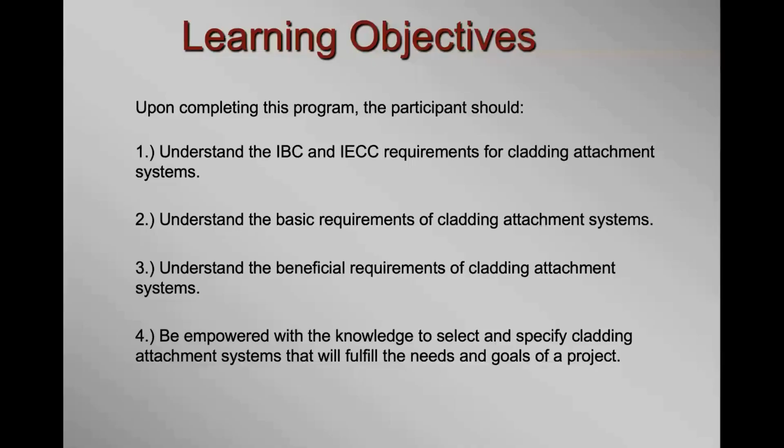So what I did is, I have a little bit of OCD. One night, I had a lot of my architectural clients sending me cladding attachment systems after continuous Z-furring was ruled out by the code. And I'd say, well, yeah, this does this, but it doesn't do that, and it does that, but it doesn't do this. So for my consulting, I sat down one night and just sat there for hours, and I compiled a list of what you need for a rainscreen cladding attachment system. This was my wish list.

It has to, number one, withstand the loads imposed on it, and I'm happy to report they all do. It has to comply with IBC and IECC requirements - there are many out there that don't. It can't burn - this is your non-combustible requirement for non-combustible constructions, which is types 1 through 4. It results in minimal thermal bridging through the continuous insulation. So if it can't burn, it's probably going to be metal. Since metal is a thermal bridge, there's a definition for it - I'll show you.

You want to minimize the amount of metal in the system that passes through the insulation. I want it to install easily with few parts to assemble. I want it to provide the required adjustability without having to shim, because shimming takes time and extra cost to buy the shim. I want the cost to be reasonable. The costs right now are anywhere from say $3 a square foot up to like $11.50 a square foot, so there's a big range on cost.

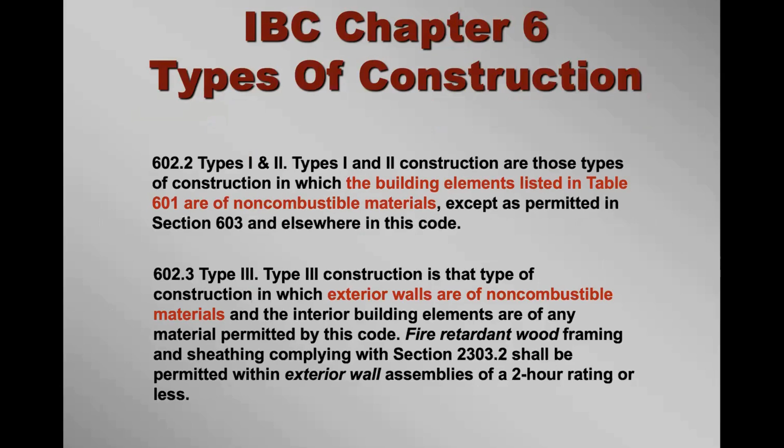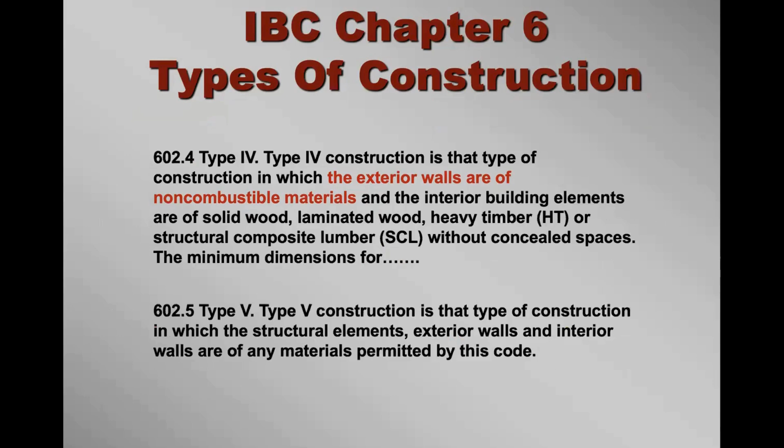Let's look at the IBC code requirements. There are non-combustibility requirements and fire rating requirements for load-bearing members and other components in the exterior wall assembly. Section 602.2 states for types 1 and 2 construction, the building elements listed in table 601 are of non-combustible materials. Type 3 construction says exterior walls are of non-combustible materials. Type 4 construction is heavy timber construction—these have to be non-combustible materials. As you know, heavy timber, once it starts to burn, chars on the outside and that protects it. Type 5 construction, you can use any type of material, including combustible materials.

Chapter 7 of the code states that load-bearing structural members within exterior walls or on the outside of the structure shall be provided with the highest fire ratings as determined in accordance with Table 601 and Table 705.5. So your cladding attachment system is a load-bearing element. It's going to bear the gravity load of your cladding system, and it's also going to transfer the compression and suction wind loads to the structure.

Looking at Table 601, you can see for exterior bearing walls, there are fire rating requirements. So on top of being non-combustible, type 2B doesn't need a requirement, and type 5B doesn't need a fire rating at all.

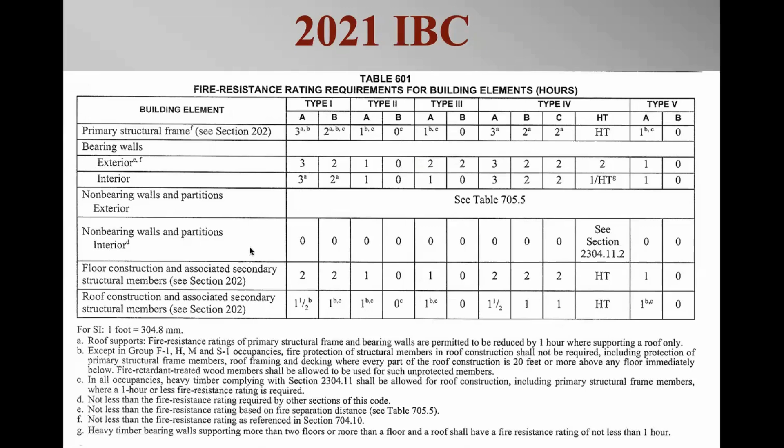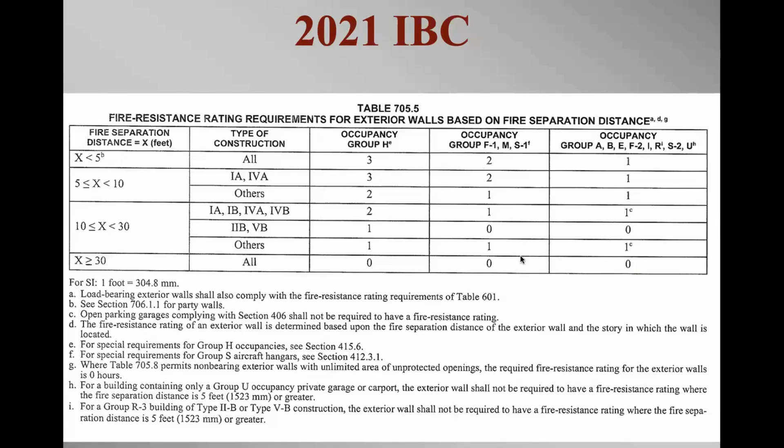So a good handful of manufacturers are using fiber reinforced polymers, or FRPs. When I was growing up, we called this fiberglass, but now there are different reinforcings other than glass, such as carbon fiber and some others.

They say theirs meets the code because chapter 26 of the code, section 2612, states that fiber reinforced polymer should not exceed an aggregate total of 20% of the area to which it is attached. Single architectural elements should not exceed 10% of the area specific to the wall to which it is attached, and no contiguous sets of architectural elements shall exceed 10% of the area.

In my opinion, and that of many experts in the business, this is for architectural features—it even says architectural elements. This is for things like trims, etc., that are attached to the veneer of the building. I don't think this refers to the cladding attachment system, so I don't think this argument holds water.

The other argument I get a lot for FRPs is, 'our product passed NFPA 285.' I have to remind them that NFPA 285 is not a product test—it's an assembly test that evaluates an assembly for fire propagation characteristics of exterior non-load bearing wall assemblies. It's only a 30-minute burn, so there's no way you can get a fire rating off of this. There are only two failure criteria: flame propagation and temperature exceedance.

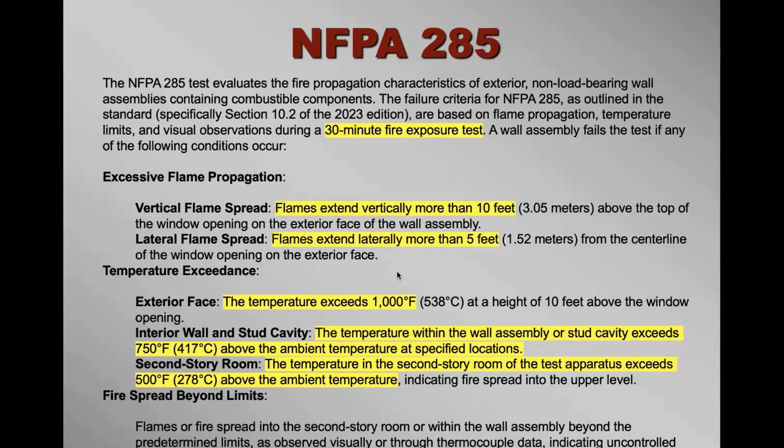So just a quick recap: it's a 30-minute burn, it tests for fire propagation, and the failure criteria is flame spread and heat generated. Rain screen cladding panels falling off the test panel does not constitute a failure—and this is something that a lot of people have presented or talked about.

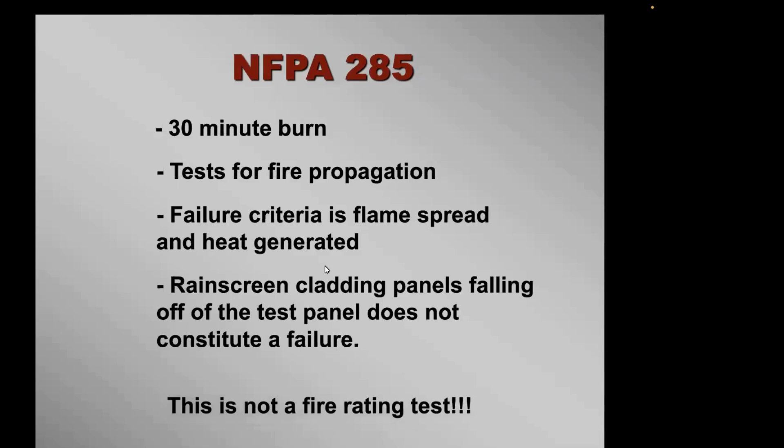This, like I said, is not a fire rating test.

And if any of those criteria are hit, flame spread or temperature achieved, then it's considered a failure.

The other argument I get a lot for FRPs is, oh, well, we're Class 1 fire rated under ASTM E84. ASTM E84, known as the Steiner tunnel test or the tunnel burn test, is used to evaluate the surface burning characteristics of materials. It's not a fire rating test, it's a fire propagation test. So it's testing how fast that product burns.

There's only two key metrics in ASTM E84: one is the flame spread index, and one is the smoke developed index. For flame spread, your Class A or Class 1 — this is where they say it's a fire rating, but it's not a fire rating, it's a burn rating — is 0 to 25. Class B or Class 2 is 26 to 75, and Class C or Class 3 is 76 to 200. For all classes, the smoke developed index is 450 or less.

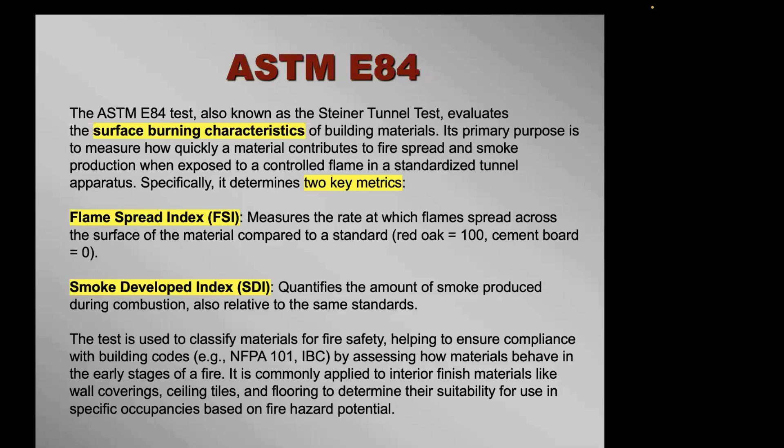So basically, this test was to assess how materials behave in the early stages of a fire, and it's commonly applied to interior finishes like wall covering, ceiling tile, and flooring to determine their suitability for use in specific occupancies based on their fire hazard potential.

Another claim some of these manufacturers make is that they've added a flame suppressing additive to it. I have a product called GMX that I invented. It's used for spray foam stop — if you're doing spray foam and you come up to a door or window perimeter, you put this up instead of trying to square it off, putting wood there, or having someone stand there holding a spray stop.

Back around 2013, 2014, when everybody jumped on the E84 bandwagon for exterior wall elements, I had to add this to be able to pass the E84 to get a Class A rating. And as you can see, it still burns.

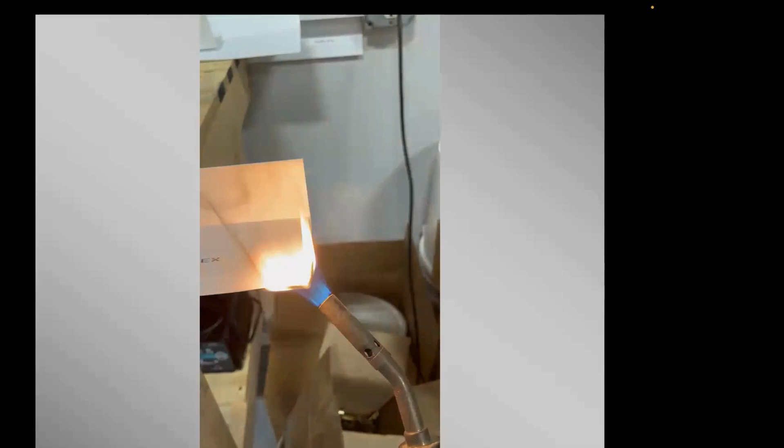But once you take the flame away, the self-extinguishing additive puts the fire out. But in a building fire, the fire doesn't just turn off. So we can see it goes out, but it still burns.

All right, let's look at the IECC code requirements now for exterior wall assemblies. You have wall assembly U-values — there's performance requirements and prescriptive requirements. I like to stick with the performance requirements. I don't agree with the table and the prescriptive requirements. I think that under many conditions you can have a failure of that wall assembly hygrothermally.

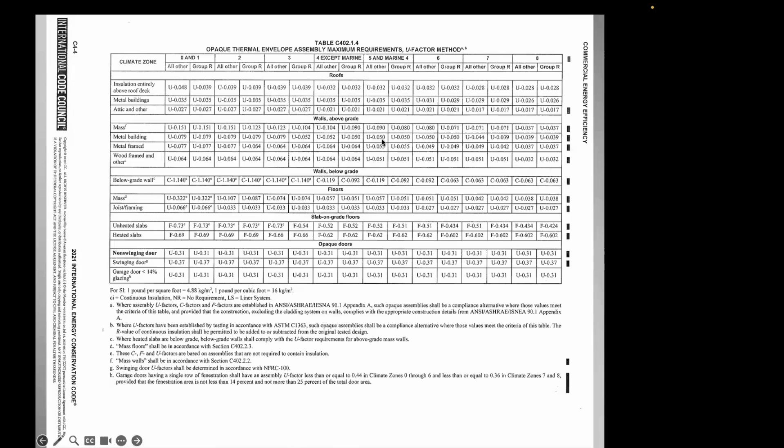And then they define continuous insulation. So here's your performance requirements — I'm in zone 5 here. So for a metal frame building, my exterior wall assembly, the whole assembly has to have a U factor of 0.055.

So what does that mean? I know a lot of people don't identify with the U factor as well as the R value. So if you take the U factor for a metal framed exterior wall in my climate zone, which is U 0.055, the U factor is the inverse of the R value. So if you divide 1 by the U factor, you're going to get R 18.18.

Now, that value is determined by the ASHRAE 90.1 committee. They review it every 3 years, and based on your climate zone, they do a scalar analysis or cost benefit analysis, and they feel that R 18.18 or U 0.055 is the optimal insulation value. When you go above it, it's not justified based on the cost of materials, cost of adding them, and the energy savings.

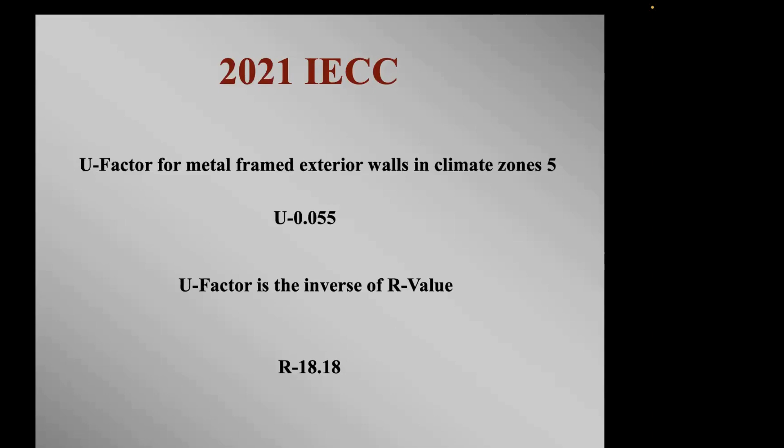You don't need to go above that. So the other chart that I don't like, the prescriptive requirements in the code here, is for metal frame buildings in zone 5. You want R13 insulation and then R10 continuous insulation over the sheathing.

If you have a high humidity building, I've run a lot of WUFI, or hygrothermal, analysis. I find that in medium and high humidity environments, that wall assembly fails. There's too much moisture that builds up in that wall. So I like to steer designers away from using this table. I'm in Massachusetts, and in our stretch energy code, 300 of our 351 municipalities have adopted the stretch energy code that says you cannot use this table. I'm hoping someday the International Energy Conservation Code Committee will get rid of this table.

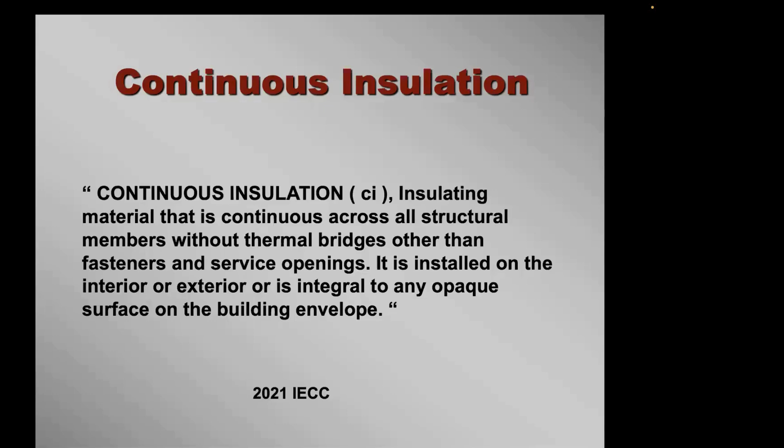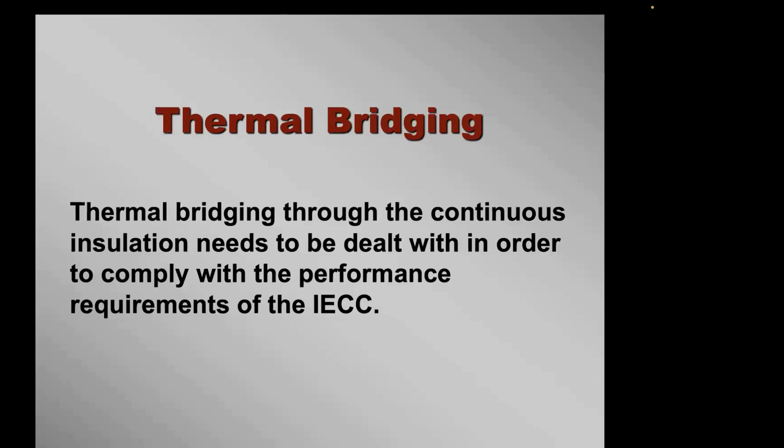It also defines continuous insulation, which is insulating material that is continuous across all structural members without thermal bridges other than fasteners and service openings. Why did they put this in? Because thermal bridging through the continuous insulation needs to be dealt with in order to comply with the performance requirements of the IECC. So finally we're getting a little smarter about our insulation. Instead of just saying more, more, more, let's get rid of the thermal bridges through it and make that insulation more effective. Basically, this gets rid of our continuous Z-furring that we've used for a lot of years. You can't use this anymore in exterior walls per the definition.

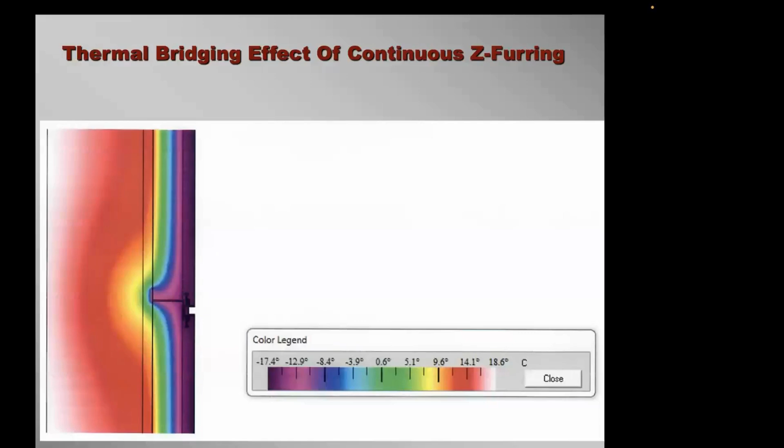And I'm going to show you that you won't comply with the performance requirements of the code if you do use it. Using a program called Therm, which is a free download from Lawrence Berkeley Laboratories, you can show the effect of thermal bridging on that continuous insulation. Basically, you lose 46% of the R-value of your continuous insulation. So if you have R10 continuous and continuous Z-furring at 2 foot on center, you only have R5.4. So you don't meet the R10 continuous requirement.

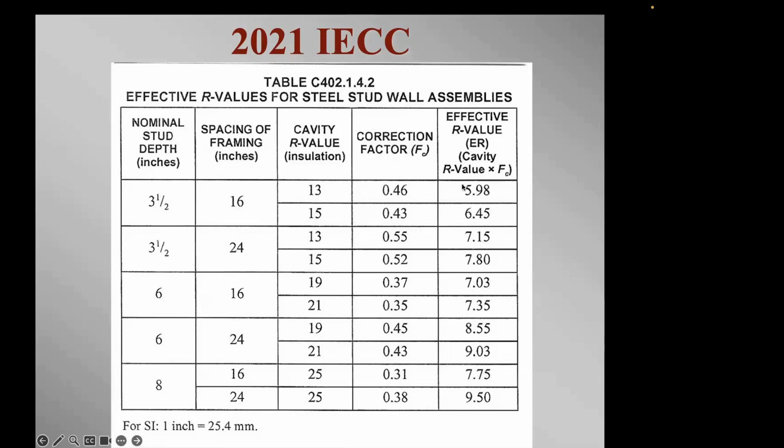What they also did in the code is put a table in here to penalize your assembly for light gauge metal framing, for steel studs. So if you take the R13 that they say you can have inside the stud cavity and factor in the thermal bridging, that value is only R5.98. With continuous insulation, if you go R10 continuous and R13, then factor in your thermal bridging, you're only at R11.38 - that's 5.98 plus 5.4. So you're not meeting the performance requirements of the code. That's why I want that other prescriptive table taken out of the code.

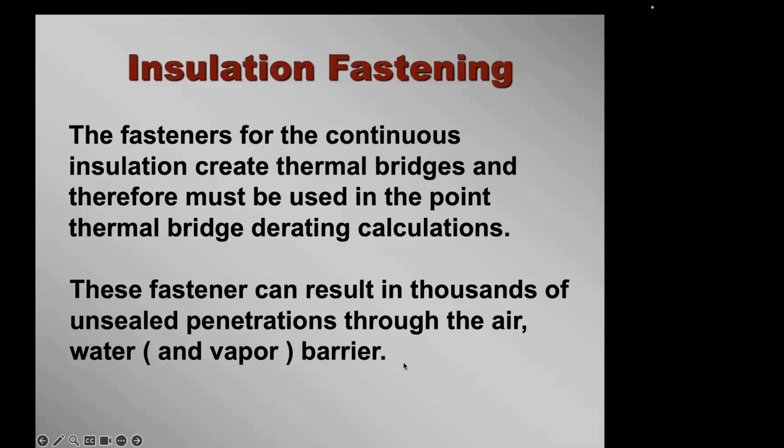I pressed and pressed the Air Barrier Association to get going on some research. They finally did, trying to come up with a test to see how this affects your air barrier. They did a first round of work on it, and then COVID hit. We're partnering with Oak Ridge National Laboratories in Oak Ridge, Tennessee - they were heading it up. We got through the first round, COVID hit, and now the person in charge of it can't fly, so it's kind of dead in the water. I'm still pushing them to finish the whole research project and come up with a test protocol for this.

So the 2024 International Energy Code requires the derating of insulation based on the amounts and types of thermal bridges through your continuous insulation layer. This is accomplished by factoring linear thermal bridges and point thermal bridges. And if anybody's done a passive house project, passive house already does this.

They've been ahead of the code for a while, and now the code's trying to catch up to what they're doing.

C402.7 deals with thermal bridges in above grade walls, and it says you have to comply with this section or an approved design. There are some exceptions.

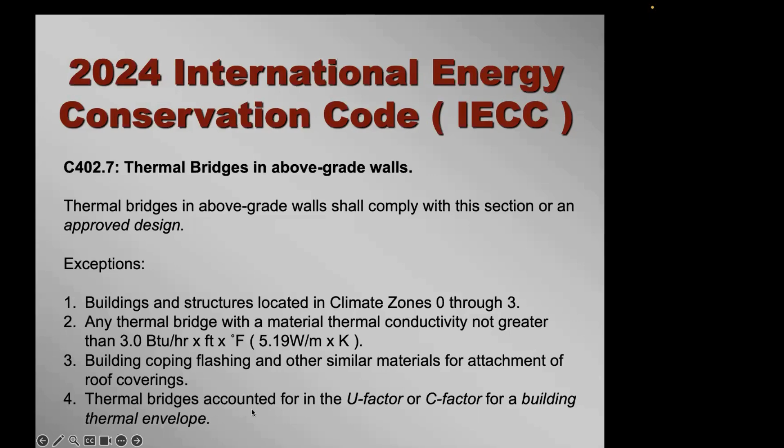Number 4: thermal bridges accounted for in the U factor, C factor for building thermal envelope. This is what passive house does.

For your cladding supports, it says linear thermal elements supporting opaque cladding shall be offset from the structure with attachment that allows the continuous insulation, where present, to pass behind the cladding support element, except at the point of attachment. There again, they have the exception for a passive house approved design where the above grade wall U factor is calculated for it, and then anchoring the windows.

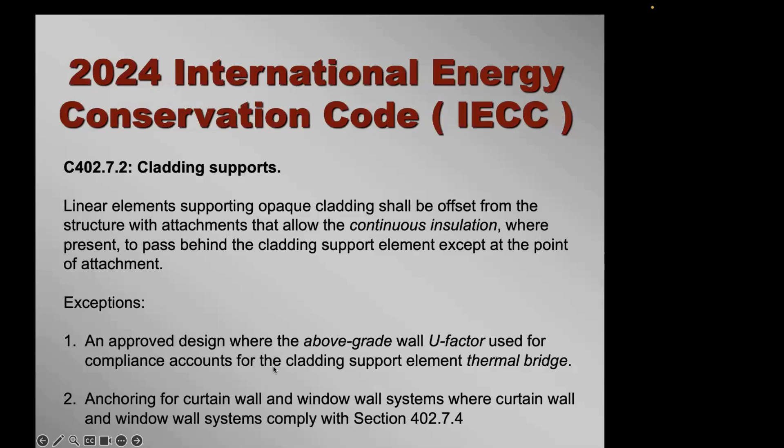So basically, you have to derate for your linear thermal bridges and your point thermal bridges, and this includes insulation fasteners. They spell out your linear thermal bridges for you, but they don't tell you how to do your point thermal bridges. They really don't address it.

I don't know why. I've brought this up and people are looking into it. They're trying to get this code cleaned up because it's a bit of a mess right now.

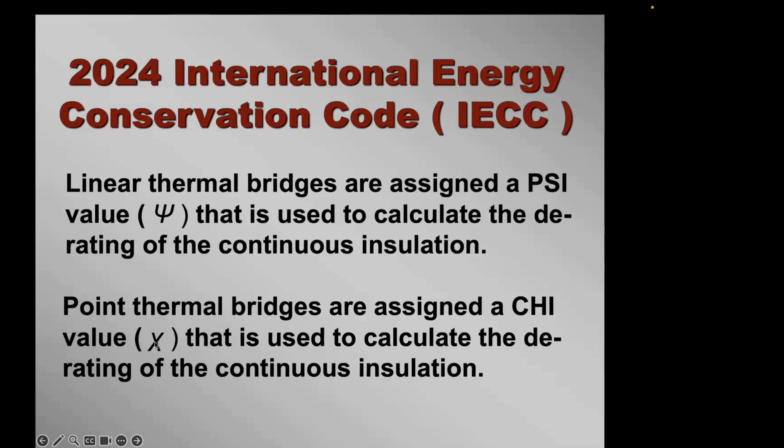So for your linear thermal bridges, you're assigned what's called a psi value, which is this italic trident here. And your point thermal bridges are assigned a chi value, which is a subscript italic X. These are used to calculate the derating of your continuous insulation.

So you take the sum of your psi value of each linear thermal bridge times the length, and sum them all up. Then you add to that the sum of all your chi values, or your point thermal bridges, times the number of those point thermal bridges. You divide that by the area of the opaque wall, and add that number to your U opaque, which is your wall with insulation. That's going to bump your U factor up, which worsens the performance. So it's not that tough to understand once you read into it.

I'll break this down. For your linear thermal bridges, to get your derated U factor, you take your psi value times the length, divided by the total area of your opaque wall, and add that to the U factor of your opaque wall. You're going to get your derated U factor.

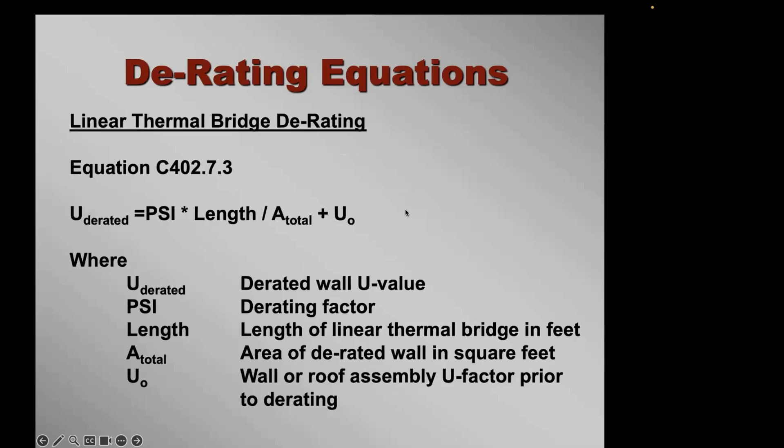For your point thermal bridges, again, it's chi value times the number of point thermal bridges divided by the total area of the opaque wall, add that to your U of the opaque wall, and you come up with your derated U factor. So in the code, they give us table 402.1.4.

Let's take a 20,000 square foot building. You'll have about 10,000 linear feet of attachment if you use the linear thermal attachment here. So 0.2 times 10,000 feet divided by 20,000 is 0.1, plus 0.0775. You get 0.1775. That brings your R value down from, if you're using 3-inch mineral wool, 12.9 to 5.63.

So your derating is 0.436. That's a huge derating. And when I run these numbers, they don't make any sense to me.

If you do the psi factor of 0.3 for non-compliant, your derating is 0.338. And these numbers just don't work in the real world. Like I said, I know some people who are working on trying to clean this up.

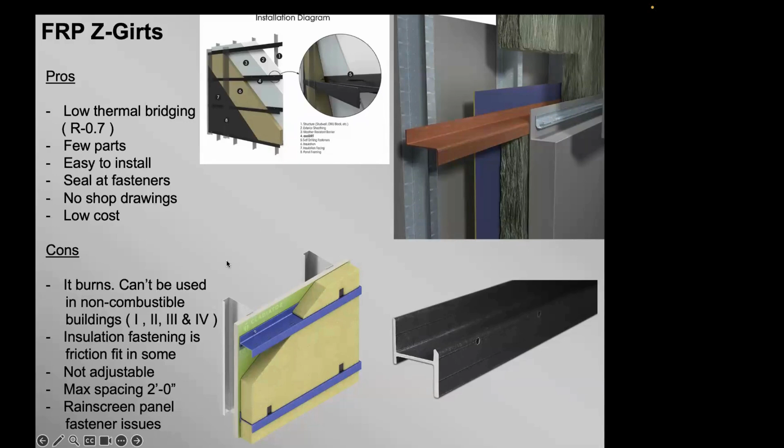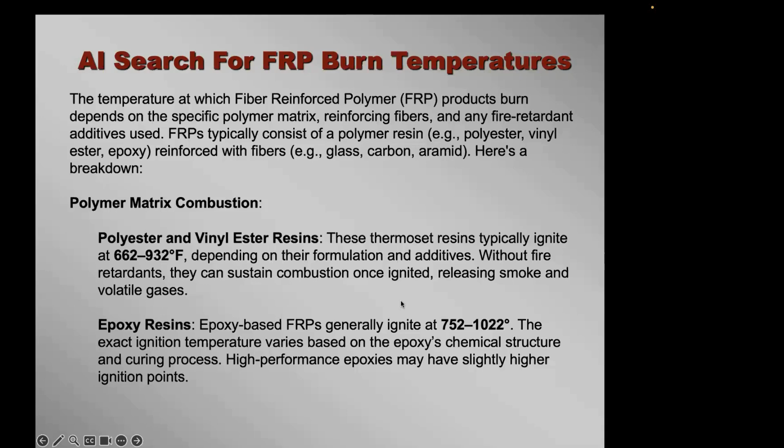So looking at the FRPs, I did an AI search for FRP burn temperatures. Most of these are polyester resins. The polyester and vinyl resins burn between 662 to 932 degrees. Your epoxy resins ignite at 752 to 1022 degrees. But they don't really burn, they go through thermal decomposition like wood does. They call it pyrolysis, and this is around 572 to 752 degrees F for your thermosets, which most of them are. I believe all of them are a thermoset.

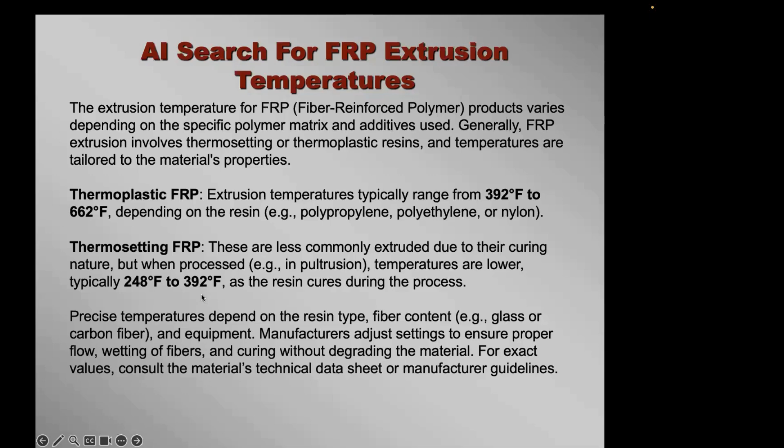But what's more concerning is that in order to make these materials in that profile, they have to get them to a liquid phase. So they have to melt at a certain temperature, and that melt temperature has to be below the burn temperature, otherwise you'll burn the material up. So your thermoplastic FRPs, that melt temperature, so they can get it through the Play-Doh fun factory of life, so to speak, is 392 to 662, depending on the resin. For thermosets, it's 248 to 392 degrees. So it's about half the burn temperature. It all depends on what's in there.

So here's the concerning part. I did an AI search for building fire temperatures. Your early stage temperatures are 212 to 932 degrees F. Fully developed fire is 1112 to 2192 F. Peak temperature is a little over 2700 degrees. These products are going to melt in a building fire, and you're going to have rainscreen panels falling off the building.

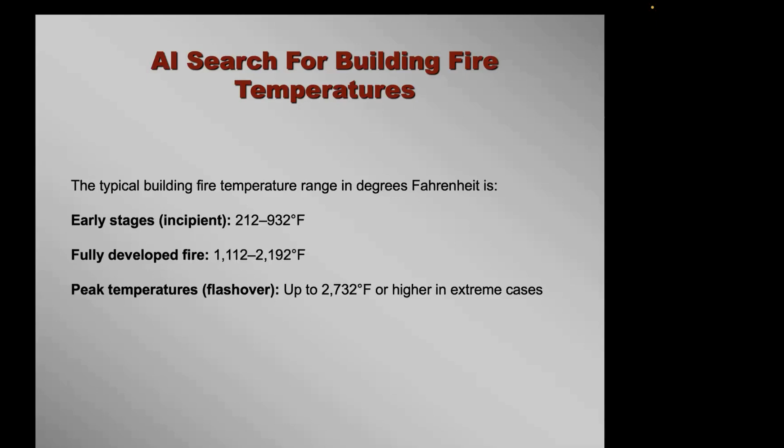I've spoken to several firemen I know, friends of mine, and I said, you guys, when you're fighting a fire, you're not looking up to see if anything's falling off the building, right? And they said no. When I tell them about this, they're very concerned about it. I know in the city of Boston they're looking into it. The Inspectional Service Division is looking into this because they don't want firemen hurt or even killed by these panels falling off the building, or bystanders, or the damage it can do to vehicles, fire vehicles, and everything. So not only do I interpret the code to say you can't use these, I think just common sense says you don't want to design or build a building that's going to have panels falling off of it if the building catches on fire. It's just common sense.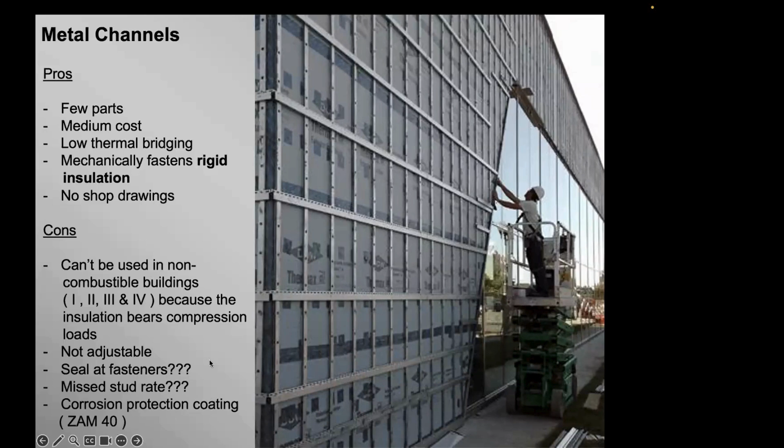And I don't like the corrosion protection on this. It's called ZAM 40, and I'll explain why a little bit later in the presentation.

Here's another one just like that, but this one's heavier duty. It can hold a much heavier panel, and they paint it black so you can use it with open joint rainscreen panels. Few parts, medium cost, fairly low thermal bridging, but a lot of screws passing through the insulation. It does mechanically fasten the insulation, and you don't need shop drawings on this one, I don't believe.

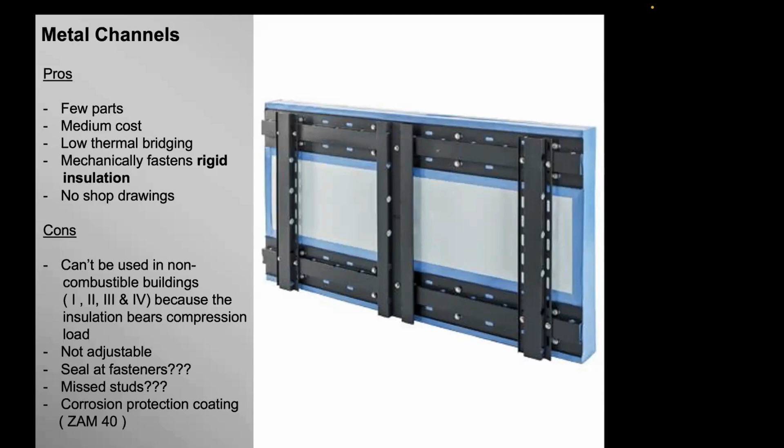But again, you turn this insulation, something that burns, into a load-bearing member, so I don't think it can be used in type 1 through 4 construction, and I'm not the only one who thinks that. There's no adjustability, and again, I question the seal at the fasteners. How do you hit the studs every time with a screw through 2 inches or more of insulation? This one also has that ZAM 40 corrosion protection that I'm not a big fan of at all.

There's another system out here. It's got fiberglass clips, you can see these red clips here, and then a Z-furring that's screwed through this. Few parts, low thermal bridging, doesn't need shop drawings. The cost is fairly low, but these fiberglass clips burn, so I don't think you can use that in types 1 through 4 construction.

As you can see by the insulation fasteners, it doesn't provide for the fastening of the insulation. The insulation fastener is going to add to the thermal bridging. And you can see here at the bottom of the insulation, you have to cut and fit this around the cladding attachment system, which is going to require a lot of labor.

There's no adjustability in this, so you're going to have to shim every panel, and I question the seal at the fasteners. I have a friend that worked for a big engineering company, and they asked him to do an E330 water test on those, and it failed, because the backs of these clips are hollow, so they don't recommend using it.

So this is probably one of the more popular systems out there. It's clips and a metal rail. It's fairly low thermal bridging, but you do have a fairly substantial piece of metal going from the warm side of the insulation to the cold side, so it's going to transmit heat through there.

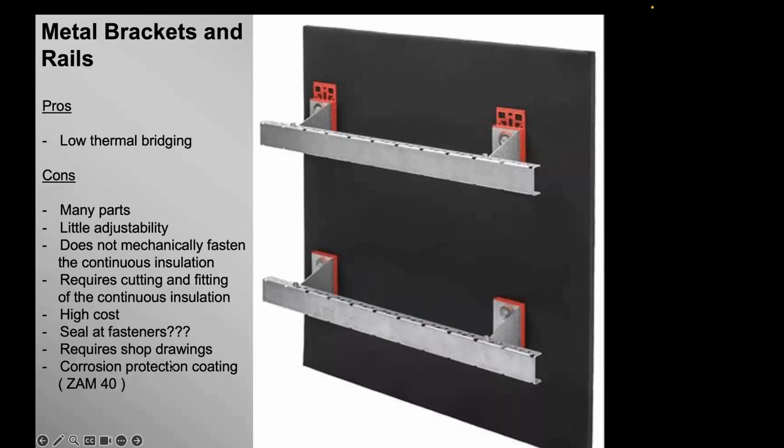You have to cut and fit the insulation around the base plates here. Cost is on the higher end. I question the seal at the fasteners because the backs of these red parts are hollow. I know one consulting engineer makes them set these in a full bed of silicone seal, and because of that concern, it does require shop drawings. The corrosion protection on this is also that ZAM 40 product that I'll get into a little bit later.

So then you have metal clips and rails. There's aluminum or G90 galvanized. They're very corrosion resistant, both of them. There's some adjustability built into these, but as you can see, it's two parts. So you have to do a psi value for the clips or a psi value for the rail, the attachment rail, and a chi value for the clips. It's a complicated calculation for that.

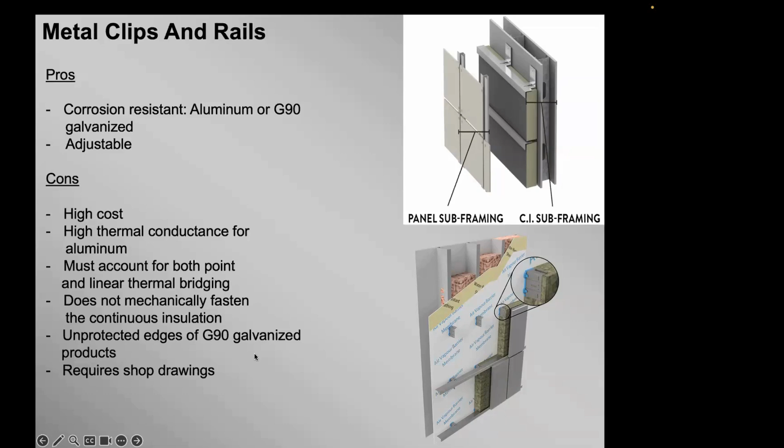The costs are high. The aluminum has very high thermal conductance. Like I said, you have to account for both point and linear thermal bridging. It doesn't mechanically fasten the continuous insulation. It'll retain it at the top, but I'd rather see it held on multiple points. And if you're using the G90 galvanized, they galvanize a whole sheet and then they cut and bend and punch holes through it. So the edges where it's cut, I don't think are protected well. They have an argument for that, but I don't really agree with it. I'll show you that later. And this system does require shop drawings.

So I'm seeing more and more of these come out with the stainless steel clip and rail. It's very corrosion resistant. It's low thermal conductance. Stainless has a lot lower conductance value than cold rolled steel and much, much lower than aluminum. And it is adjustable. They're starting to build adjustability into it, but it's a high cost. There's a big piece of metal here, and the stainless is very costly.

Doesn't mechanically fasten the insulation, so you're gonna have to add the insulation retainers. Requires cutting and fitting of the insulation. They show it here, but you don't, here they just lay it on top of this red piece, their thermal isolator, as they call it. But that's going to leave a quarter-inch gap behind your insulation, which you don't want, and it does require shop drawings.

This one is an aluminum clip and rail system with a THERMAClip, they call it. From the feedback I've gotten, this is the highest cost system available on the market. It is low thermal bridging, and I will give them that this is the only thermally broken system out here on the market. So you have a piece of aluminum, then something here that's a lot less conductive than aluminum. This is the only one I've seen on the market. But again, it's the highest cost.

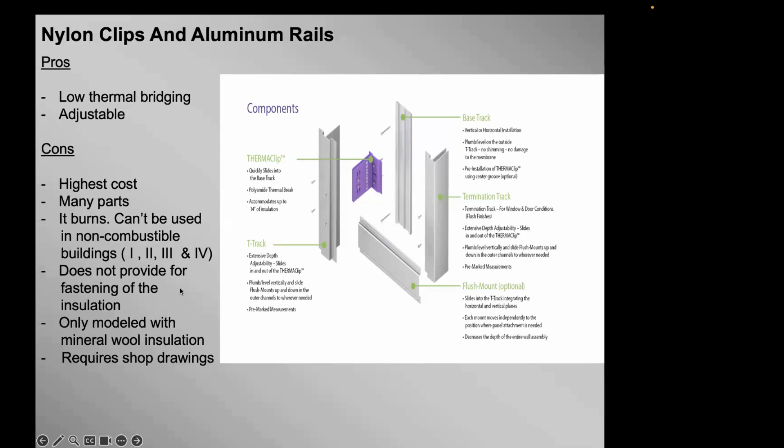It's nylon. So this doesn't provide for mechanical fastening of the insulation. Their attachment rails can hold it in place. But again, if you adjust it out and there's a half inch, quarter inch gap there, the insulation can fall away from the wall, and then you got your air flowing behind your insulation, circumventing your insulation there. For some reason, they only modeled it with mineral wool on their website, and it does require shop drawings.

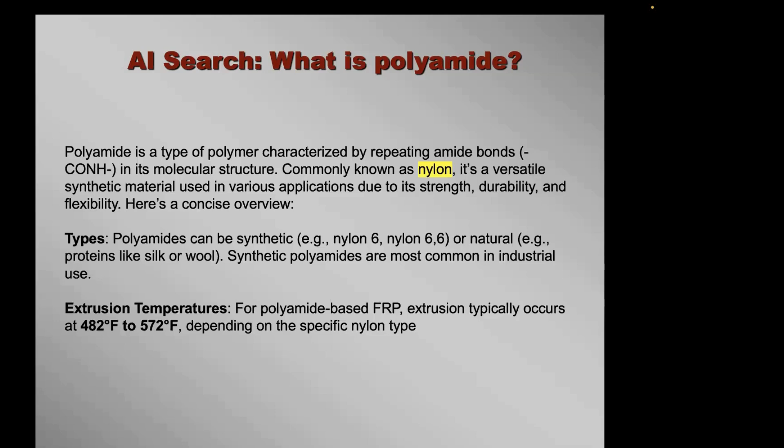So again, I did an AI search for polyamide. It is nylon. Extrusion temperatures are 482 to 572 degrees, which they have to melt it to make that piece. Like I said, your typical building fire is well over 1,000 degrees.

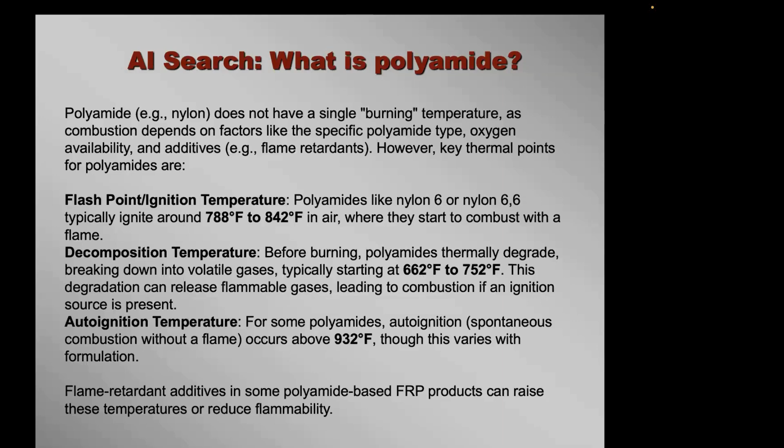So that's going to melt, which is going to result in panels falling off the building. Their burn temperature is 788 degrees to 842 degrees, but it starts to decompose between 662 to 752 degrees, and then it'll auto ignite at 932 degrees. So you can put some additives in to raise these temperatures or reduce flammability, but they still burn.

Lately, newer products on the market have been a slotted Z furring. I think they probably didn't read the definition of continuous insulation. This isn't just a fastener passing through, this is a piece of metal.

This one has a thermal isolator that clips on the back, but again, you have metal going from the warm side to the cold side of the insulation. This one's new, I guess they just rolled it out at the AIA convention in Boston in May. This green piece is their thermal isolator, but you still have a piece of metal passing through from the warm side to the cold side.

So it's medium cost, non-combustible, no adjustability. This one doesn't provide for mechanical fastening of insulation. This one does, there's little prongs that stick up. Like I said, I don't think it complies with the definition of continuous insulation in the IECC.

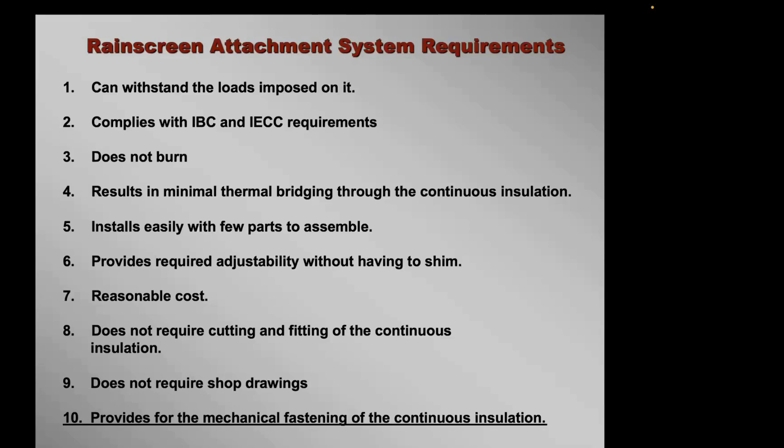So looking at the rainscreen attachment requirements, here's my list. If anybody can come up with anything that should be added to this, please email me, I'd love to hear some feedback. But this is the list I used. When I compared it to all the systems I just reviewed, I couldn't find any that met all of these. So here's my recommendations for specifying a rainscreen cladding system.

I don't think you should specify a cladding system that's combustible or has a combustible load-bearing element in any type of construction, even a wood frame building, which the code says you can do. I think these are going to melt before the wood actually collapses within itself, because if you've ever seen a building fire or house fire, everything collapses within itself and ends up in the basement.

So you can calculate your derating factor for insulation, and specify a cladding attachment system with similar, low Psi or Chi and Psi values. Because if you specify one with a derating factor of 0.9 and another with 0.7, and the contractor gets the job and submits the 0.7, you're going to have to add insulation to get to the performance requirement you're looking for. And by then it's too late.

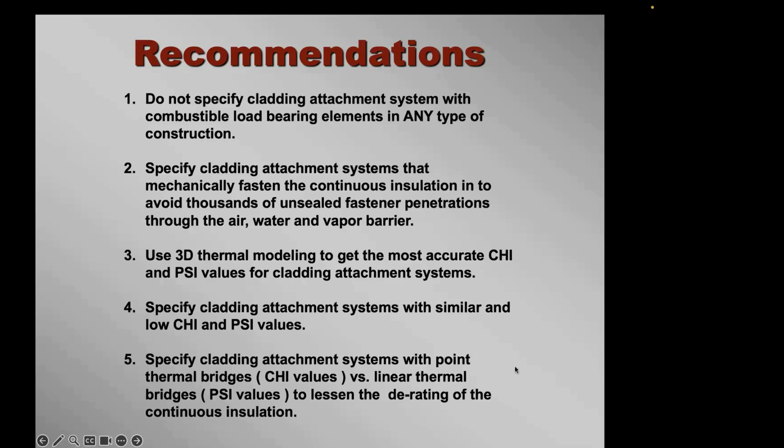The building's already drawn. What I found is the systems with point thermal bridges, Chi values, are much more effective than the ones with linear thermal bridges. They have a better derating factor. So that's the end of the technical presentation.

Usually when I do this in person, the first question I get is, well, you don't like any of them, what do we do now? What did I do? Well, I invented my own, because I didn't like any of them out there.

So what I have is a standoff MPV bracket, you can see it right here. It's very low thermal bridging, I built in an inch of adjustability, it's metal all the way through so it doesn't burn. Few parts, easy to install, one of the most cost-effective systems on the market, I price-pointed it for a reason.

You will get the seal at the fasteners that fasten the base plate. It does mechanically fasten the continuous insulation, this is that black disc right there, that's my insulation retainer, so you don't have to cut and fit the insulation around this at all. Cons, we've sold over 100,000 brackets over the last 5 years, and we have not had any complaints on it at all.

So here's the brackets, this is what they look like. You have your base plate and your standoff here, and that's going to be the thickness of your insulation. Here's your insulation retainer, let me get that out of my way. And then you have your top plate, which threads into the standoff, and there's 1 inch of adjustability built into that. So these are the various components.

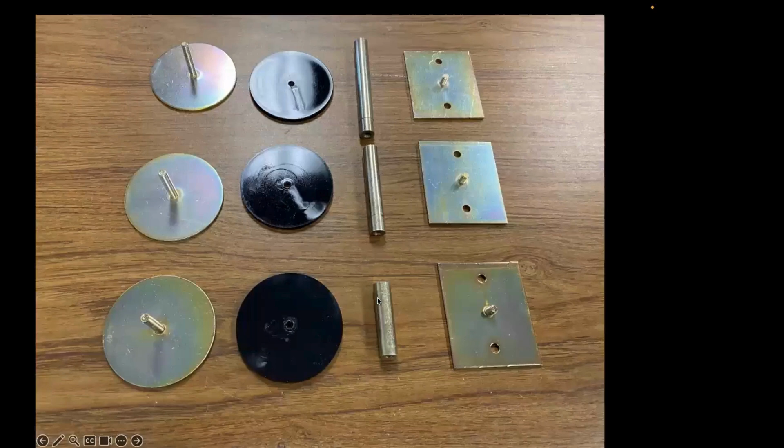And these threaded parts are called PEM studs, and they actually saved the invention, because to weld these in place and get them perfectly perpendicular was really hard to do, and the cost was astronomical. But these PEM studs save the day. It's basically a threaded rivet, and this is what a PEM stud looks like, and these teeth grab the plate that it's punched through. In all honesty, I didn't think it was going to work.

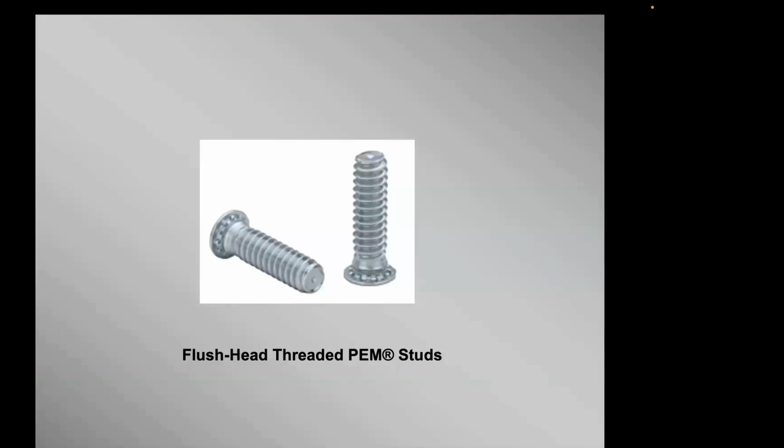I thought this would let go, but we were pleased that it didn't. I hired a structural engineer to do the calculations for what I needed, and he said for ACM panels you need a 32-pound gravity load. He asked if I wanted different strength brackets for different wind loads. I said no, give me the highest wind load per the code—I think it's like 135 miles an hour wind load. And I had it calculated for that.

Then we prototyped it and brought it to RJ Kenny and Associates to have it load tested. They put it in the Instron machine and bent it for the gravity load, and it always fails right there. I had them screw it all the way out to maximum adjustment, and it always fails right there too, so that tells me it doesn't matter how long the standoff is—your failure is always going to be in that spot. Then they pushed on the top plate, and that's when I thought the PEM stud would let go, but it didn't.

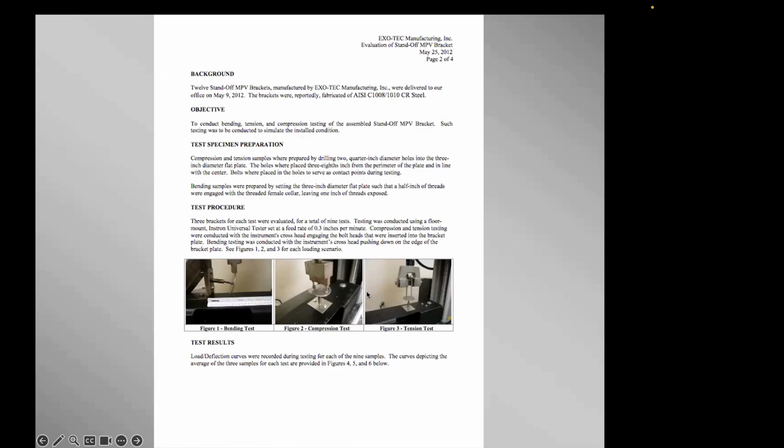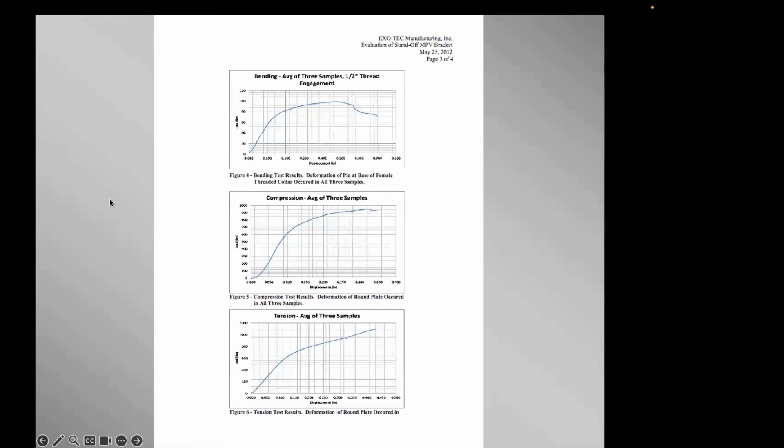A 12 gauge plate actually bent, and then they pulled on it also. They gave me the charts, and where it starts to flatten out is where they consider it a failure. As you can see in all these tests, they never went back down to zero pressure, so it was never actually tested to failure—it's just where the deformation got to the point of being unacceptable.

What they came up with was a gravity load of 60 pounds, and compression and tension of 550 and 550. What does this mean? My engineer wanted 32 pounds for gravity load, and we got 60 on bending. For compression and tension he was looking for 266, and we got 550. We're really happy with that.

What does this mean for bending? With a gravity load rated at 60 pounds, it fails at 11.25 pounds per square foot of veneer, so we say don't go over 10. If you have something more than 10 pounds a square foot, like 2 centimeter granite, you can just double up the spacing. I had it engineered to be spaced 16 inch by 4 foot to minimize the amount of metal going through the wall, but you can double up on that.

But most thin veneers are below this threshold. Your ACMs are like 4.5 pounds, thin brick is about 8 pounds a square foot, and fiber cement siding is about 6 pounds a square foot. So most of the materials you're going to clad with thin cladding are going to be under this 10 pounds.

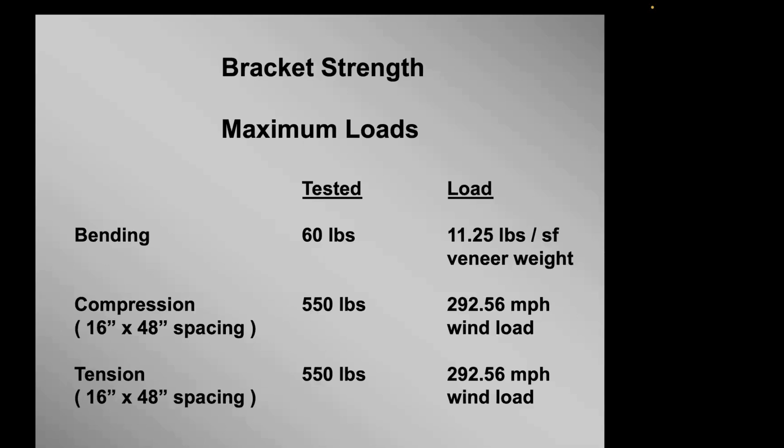For compression and tension, the 550 pounds converts to a 292.56 mile an hour wind load. The highest wind ever recorded in this country was during a hurricane in the 80s in Texas, and that was about 180 mile an hour winds.

So here's your typical layout: go 16 inch by 4 foot spacing for the brackets. That's one bracket per 5.32 square foot of wall, with just a 3/8 diameter piece of metal poking through it. For your attachment rails, instead of shipping them all over the country, we decided to go with hat furring, because you can buy that at any wallboard supply place. It's shipped in bulk, so I don't have to truck it across the country, and you get your fasteners there too—you just fasten your veneer panels to that.

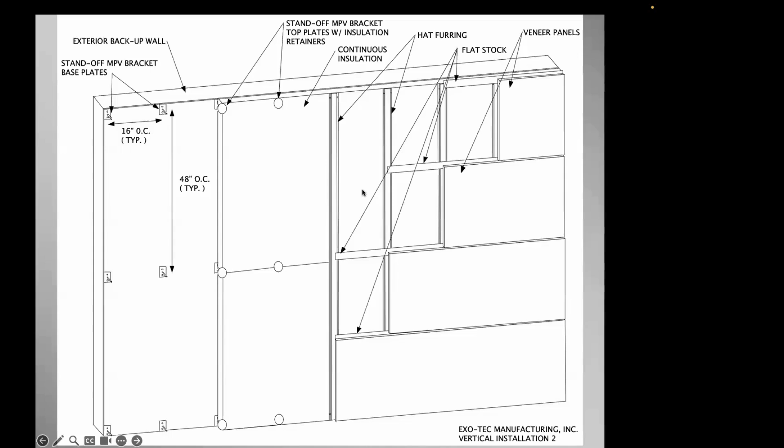Some contractors like that fastening point at 2 foot for the reveals in their metal panels. Instead of doing two sets of hat furring or attachment rails like some systems out there, I said the wind load will all be taken by the hat furring and transferred to the bracket, then transferred to the structure. So you can just put a piece of flat stock there and use that to attach to it. For your taller panels, if you want to go 1 foot by 4 foot, put your hat furring attachment rail horizontally at 4 foot—that'll work.

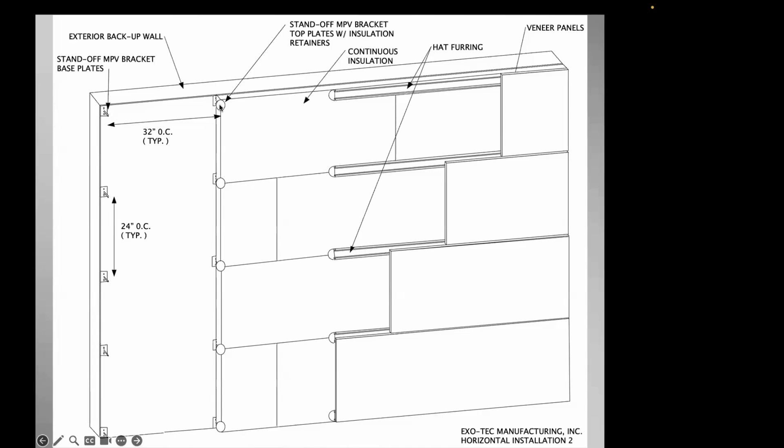I have one contractor out here near me that loves to have the hat furring at 2 foot on center, so they want their attachment rail at 2 foot. I told him that's fine if you want to go 2 foot, but you can open up the horizontal spacing now to 2'8" or 32 inches.

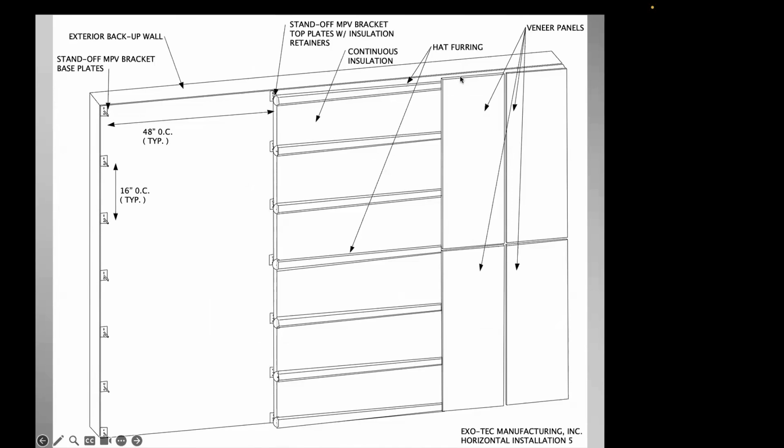So you still get that one bracket point per 5.32 square foot of wall. If you go with a real thin metal siding, like they call a single ply, it kind of flops in your hands, you can't go more than 16 inches on the span of that metal, but you can open up the bracket spacing to 4 foot.

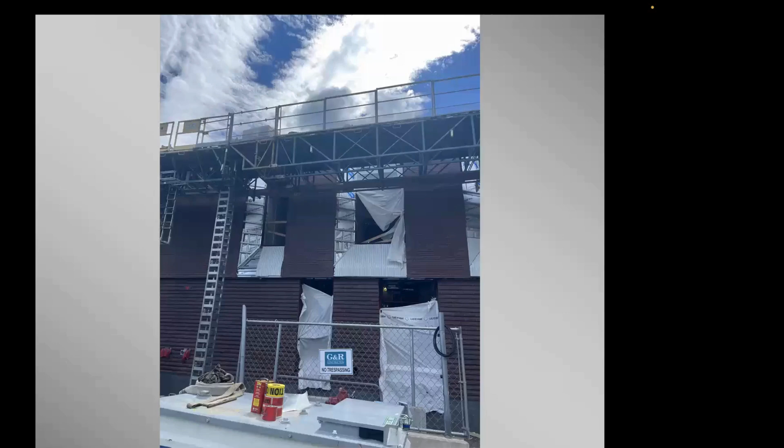You can even do thin brick veneer with the system with the brackets, your hat furring, and then attach your mounting trays to that. Here's a job in Massachusetts we just finished up a couple months ago where they had thin brick. This was conventional brick on either side of the opening, and with the insets they wanted to use thin brick. So we put the brackets up, the attachment rail, here's the white trays to stick the brick into, and here's the brick installed. He's pointing it up, and this was a job all done.

There were a bunch of these setbacks that they used the brackets and the hat furring on. So I hired RDH to do 3D thermal modeling for that using Heat 3 version 9.0. Here's the report.

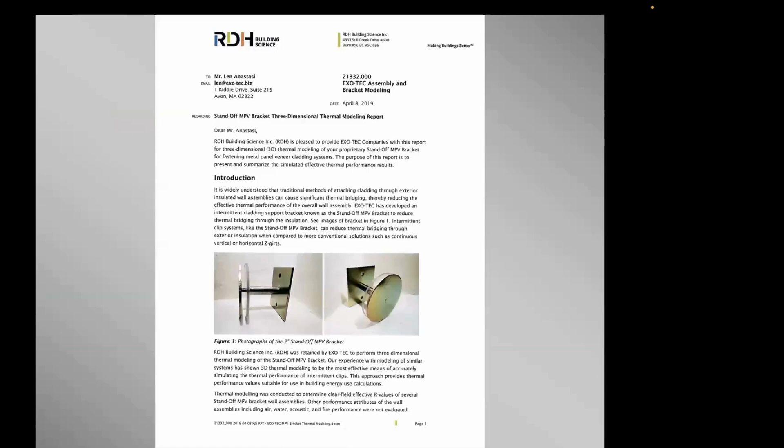They ran the thermal modeling and show you this table, depending on your stud spacing, and they want 24, 32, 42, and 48. I said, why? Mine are 16 by 48. They said they wanted to compare it with the other systems, so I don't think these values are really needed.

Then they go 2-inch mineral wool, extruded polystyrene, polyiso, 3-inch, 4-inch. But once this code kicked in for derating, I said, wait a minute, I need my chi values for this. They said, oh, they're in the appendix. So in the report, they give you the chi values to use when doing that calculation I showed you, and we'll go back to that calculation for derating.

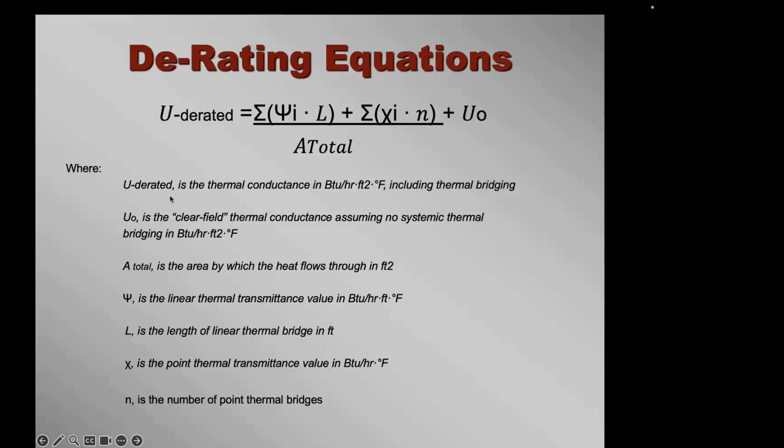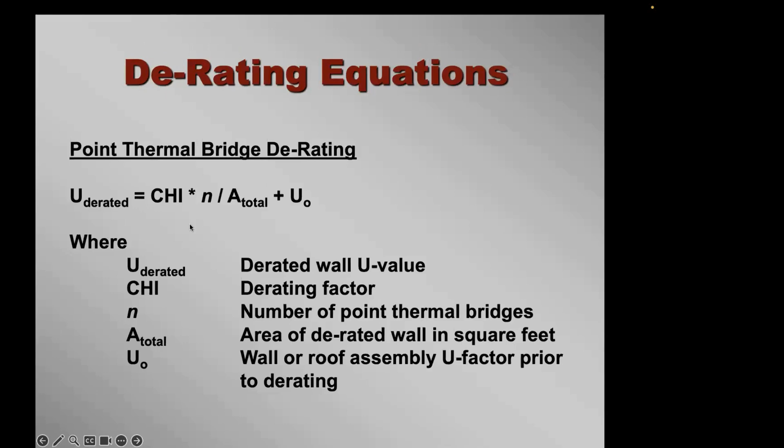For our point thermal bridges, which the bracket, standoff MVP bracket is, you take the chi value - let's go for 3-inch mineral wool, that's really popular. The chi value is 0.0409. We'll use that number in the calculation. We'll take a 20,000 square foot building, 20,000 square foot opaque wall with 3-inch mineral wool, which your R value is 12.9, U factor is 0.0775.

So to get the U derated, take that chi value, 0.0409, times 4,135, which is 20,000 square feet divided by 5.32 spacing, then I add back another 10% for top of wall, windows, corners, whatnot. Divide by the 20,000 square feet, add that to your U 0.0775 opaque wall value, and your U value bumps up to 0.0859.

Your R value goes from 12.9 to 11.64. So you take the U derated less the U opaque, there's your difference, divided by the U opaque. So the difference is an add of 0.0084, which is a 10.83% increase in the U factor.

If you want to do the devaluing of the R value, you take your original 12.9 minus the 11.64 derated. The difference is 1.26, divided by the original 12.9, is 0.0976, so it's a 9.76% decrease. So your derating value is 0.9. Your FRP, from different sites I've looked at, they're claiming 0.92 to 0.95. So we're really close to that with the brackets, and some people don't understand why.

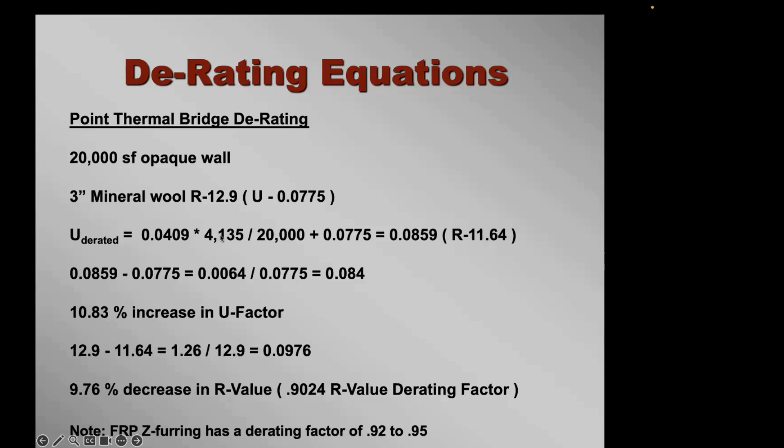I tell them, well, because from the same building, you need 10,000 linear feet of this continuous Z-furring, where you only need 4,135 brackets there when you're doing the calculation.

As far as NFPA 285, I know Jesse Beitel very well - he actually wrote it, he used to work for Hughes Associates. I had him present at the Air Barrier Association of America annual conference and trade show several times. So I showed him the bracket and asked, what can I do, do I have to run a $30,000 test? He said no, I'll take care of it, I'll write you a letter. So for the low price of $5,000, he wrote me this letter saying it won't affect it.

Here's your typical layout of your bracket with hat furring, attachment rail, and your ACM panel attachment. You can do - I have a couple, one of my customers did a mini Z. I don't know why, I'd rather have two legs, it's stronger. And of course, you have an eccentric load on this leg here when you do it.

I don't know why they did it. Because of that, they had to close up the spacing to 1 foot 4 by 2 foot, which drove the cost up. When I showed them what they could have saved, they were pretty surprised.

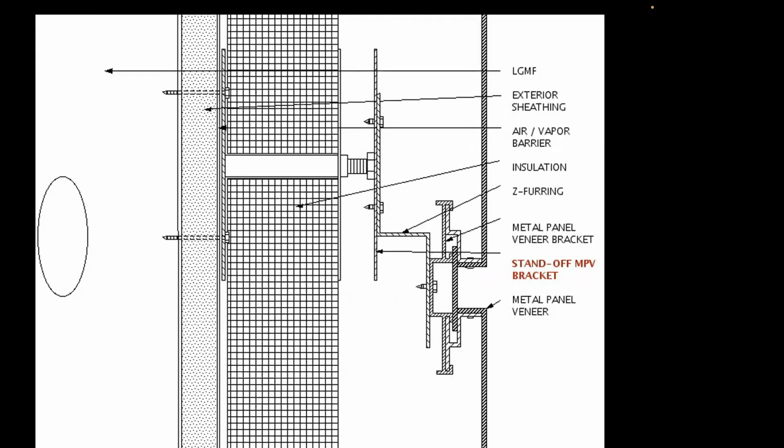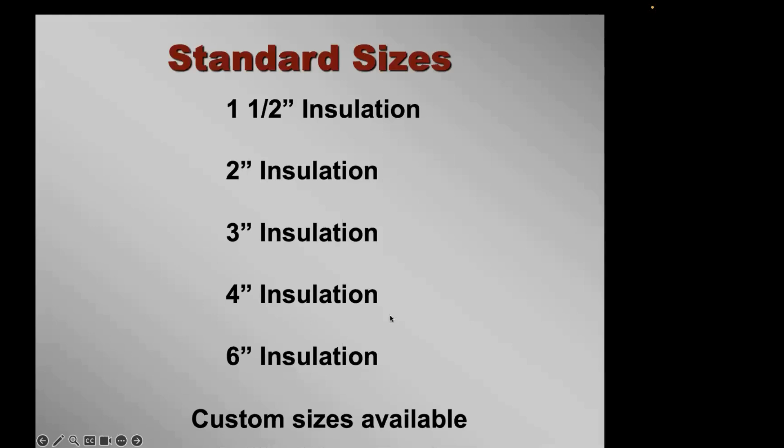They went back to their engineer and said, from now on, I want a hat furring, not a mini Z. You can do flat stock. I've done one job with that, but it has to be pretty heavy gauge. Our standard sizes are 1.5, 2, 3, 4, 6 inches, but I have all custom sizes available. You tell me the thickness of your insulation. I have a job in fabrication right now that's 5.5 inches insulation, so I can do any size.

The finishes I offer are zinc and yellow chromate plating and stainless steel. Why did I choose zinc and yellow chromate plating? Because I wanted hot dip galvanizing, but it wouldn't work—the parts wouldn't screw together after hot dip galvanizing. Ceramic coatings make the bracket more expensive than stainless. So zinc and yellow chromate plating offered the closest protection to hot dip galvanizing that I could get.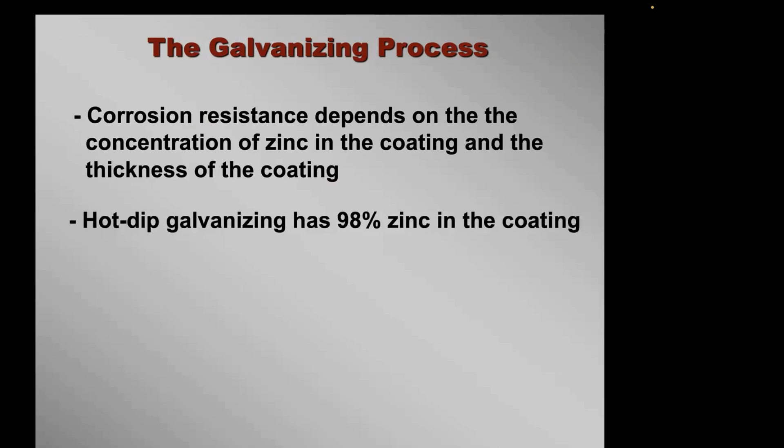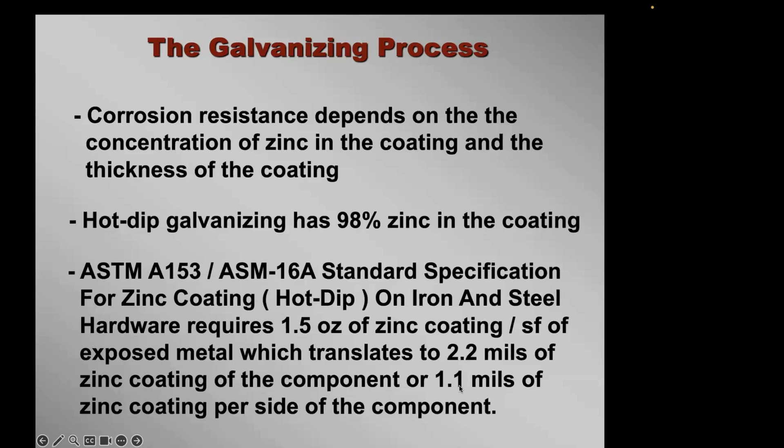Talking to the American Galvanizers Association, they told me corrosion resistance depends on the concentration of zinc in the coating and the thickness of the coating, that's it. Hot dip galvanizing has 98% zinc in the coating. ASTM A153, which has been around longer than I have, requires 1.5 ounces of zinc coating per square foot of exposed metal, translating to 2.2 mils of zinc coating, or 1.1 mils per side of the component. Zinc and yellow chromate under ASTM B633 is also 98% zinc, but the highest class, FE/ZN25, is only 0.98 mils thick per side versus the 1.1—pretty close to hot dip galvanizing. G90 galvanizing is 98% zinc but only 0.81 mils thick per side.

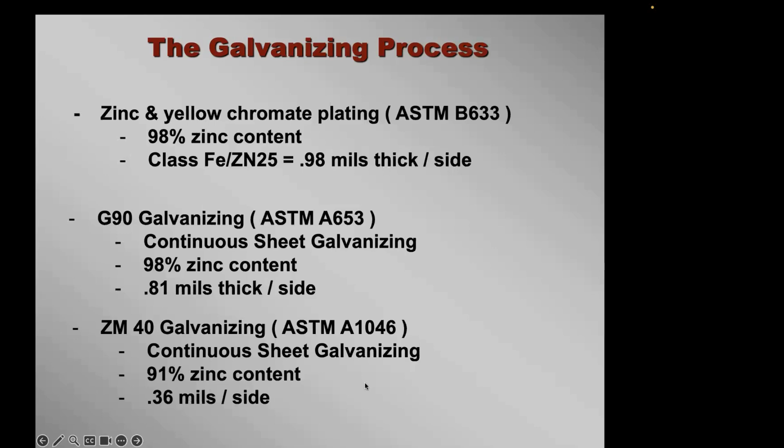ZM40, or ZAM40, is only 91% zinc. The A that was in there before stands for aluminum—they replaced some zinc with aluminum, and supposedly that makes it last longer than hot dip galvanizing in a brine tank test. But when I talked to the engineers at the American Galvanizers Association, they said the brine tank test is not relatable to hours in service at all. They have their own method of measuring, which I'll show you, but ZAM is only 0.36 mils per side. So here's the ZAM, like I was telling you—they take out some zinc and add aluminum, and they've written their own ASTM on this.

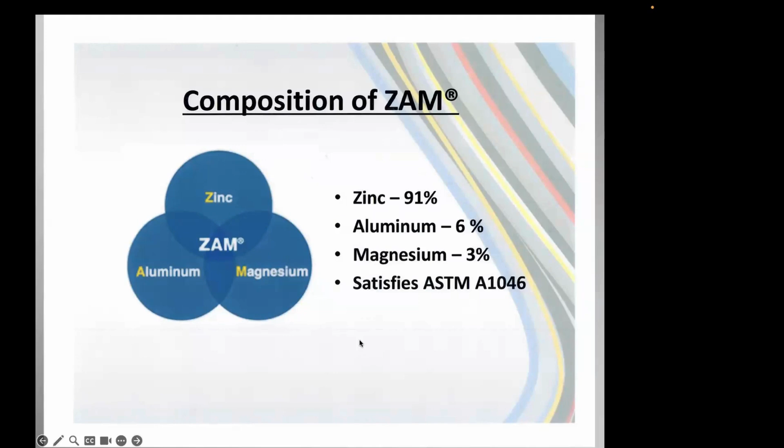ZAM was developed by Nippon Steel, I think in 2006, and brought over here around 2015 or 2016, and they wrote an ASTM for it. I asked the American Galvanizers Association their position on adding aluminum making it more corrosion resistant—they said no comment. But this is a table from the American Galvanizers Association, 'Zinc Coatings: A Comparative Analysis of Process and Performance,' and I'll show you here. This is where we get these numbers: G90 is 0.81, G60 is 0.54, G40 is 0.36.

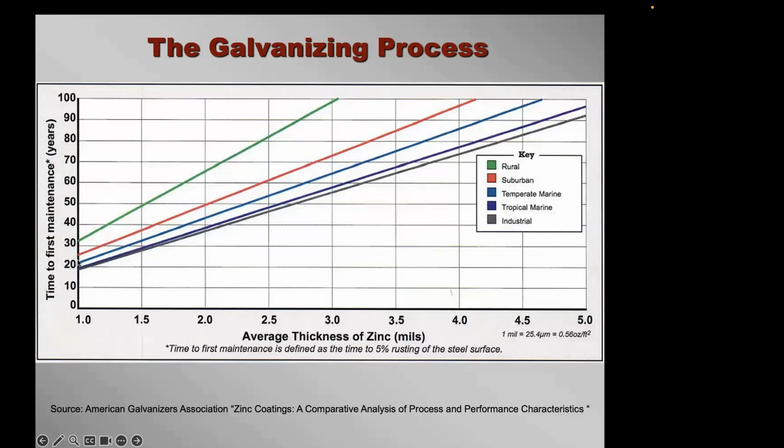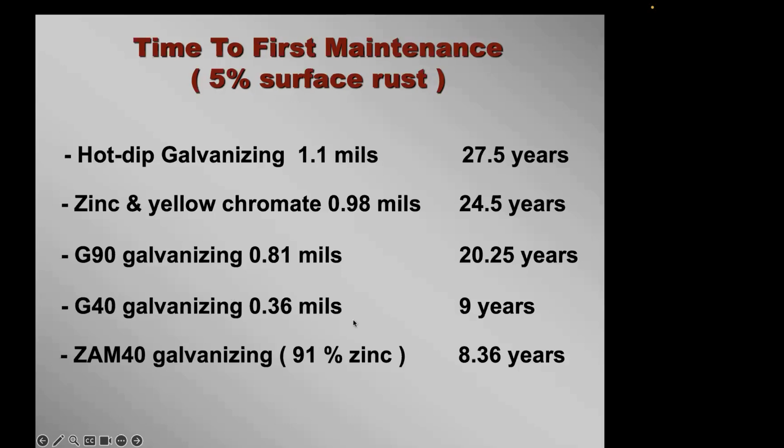What they go by is called time to first maintenance. This is their chart, and time to first maintenance is defined as the time to 5% rusting of the steel surface. In a suburban climate, at 1 mil thick, it takes about 25 years to reach 5% rust. So let's see how that translates: hot dip galvanizing at 25 years times 1.1 gives 27.5 years. Zinc and yellow chromate is 24.5 years. G90 at 0.8 mils is 20.25 years. G40 at 0.36 mils is 9 years. And because of the reduced zinc content, the ZM40 is 8.36 years.

Like I said before, I don't like these plated steels where you cut and punch, because when you cut it, you cut through that zinc plating. This is what the ZAM people said to me: when you shear it, you drag some of that galvanizing over the edge, and over time it migrates down. I don't see how a solid can migrate and protect itself—the protective film just changes from gray to gray black. A lot of the galvanizers and companies that make galvanized sheet say this too, but I was an expert witness on a job like this, 4 years old.

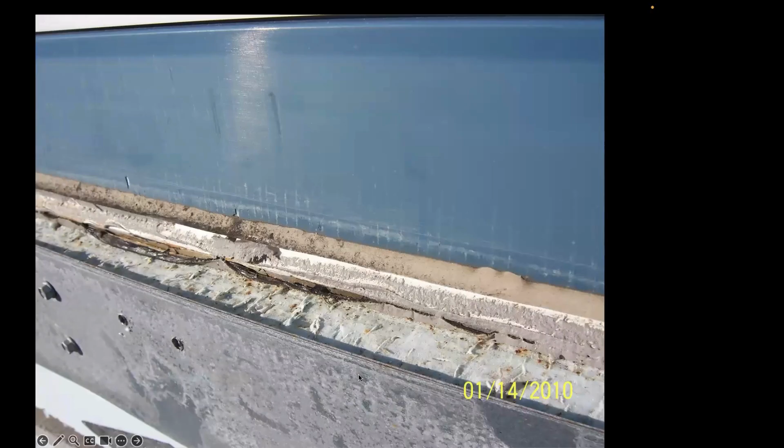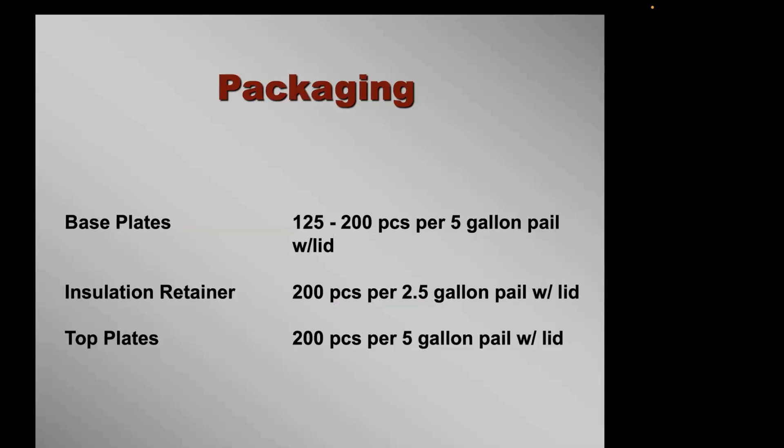My packaging, I put it in 5-gallon pails with base and top plates because there's never enough empty 5-gallon pails on a project. The insulation retainers are in a 2.5-gallon pail, and they all have lids, so they can just leave it on the lift at the end of the day. Just put the lid on.

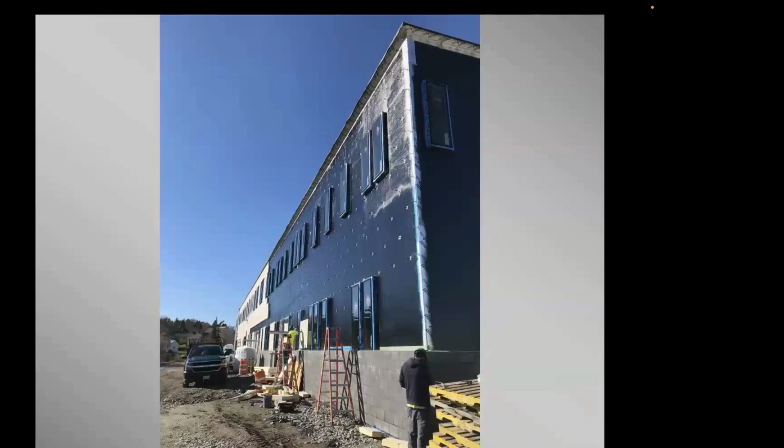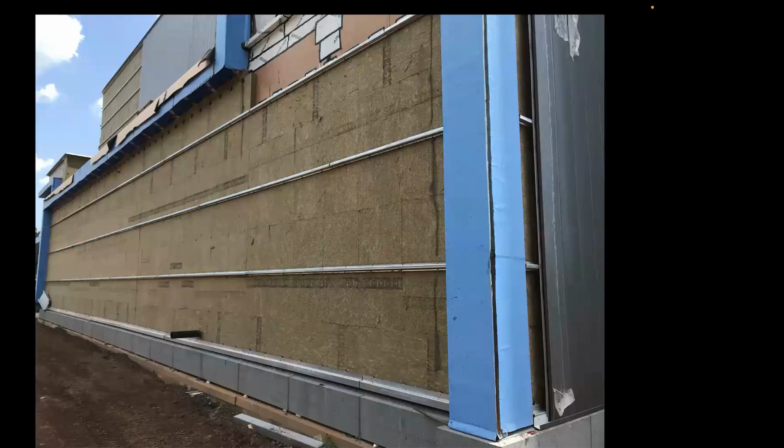Here's another job. The consultant, because they used a fluid applied air barrier, they don't like that. They made them put a blowout patch of peel and stick over every single one of them. But this was mineral wool. And mineral wool, you just poke it through, and so this again was horizontally with the tall panels on it, and you can see the engagement of the top plate screw in that furring on there.

This one, Len, can I interject? Can we have some time for a few questions? Sure, I'll just click through. I got like three. Perfect. 4 or 5 more slides. It's awesome, no worries. Take your time, same here.

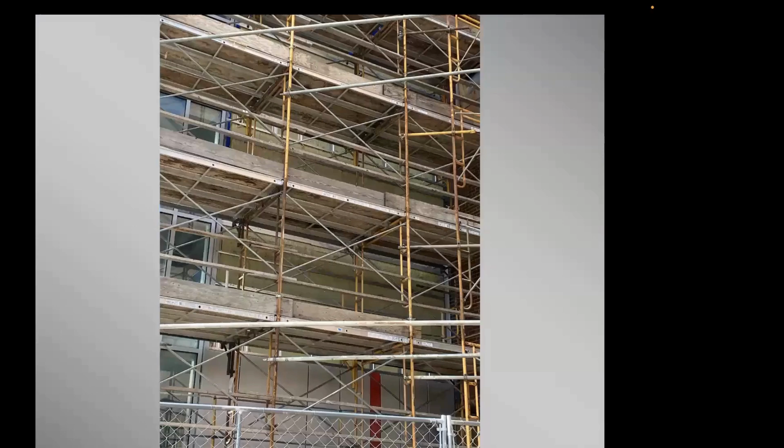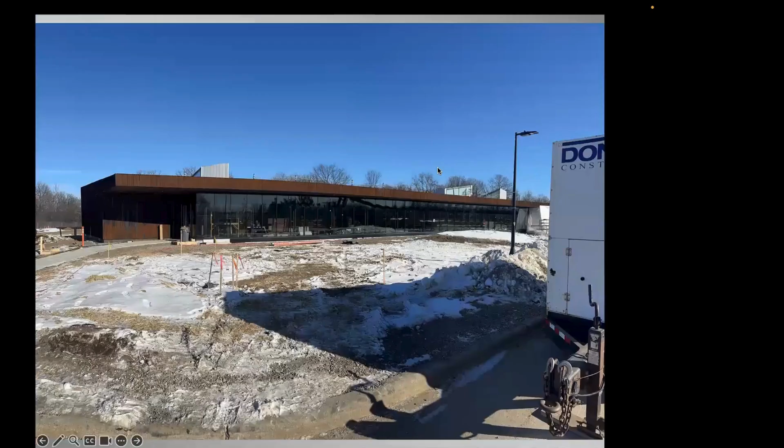Here's one with ACM panels, you can see them here. This one we just did in Arvada, Colorado. It's the first of 6 buildings were specified proprietary. This is the NREL facility, National Renewable Energy Lab, and here's the last one. This is corrugated Cor-Ten steel, weighed 24 pounds per square foot. So we had to tighten up the space in a 16 by 16, but nobody else's system could have held this up. And that is about it.